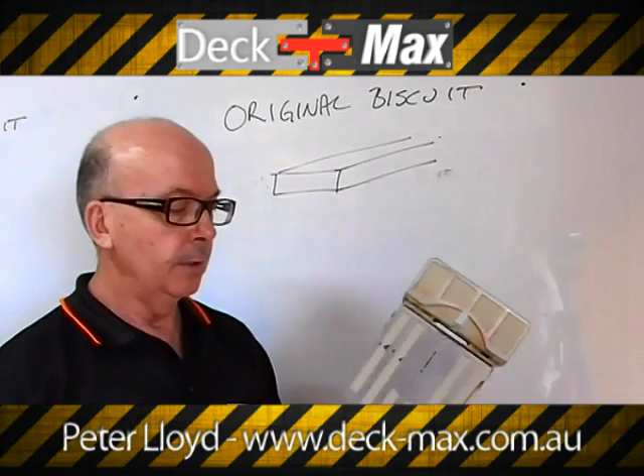This is a biscuit cutting tool. It's a standard off the shelf. You can vary how much you wish to spend on it. The blade has a controlled depth, how far out of this housing it comes, so that when you actually push and insert it, it determines the depth of the cut and the width of the cut on the front.

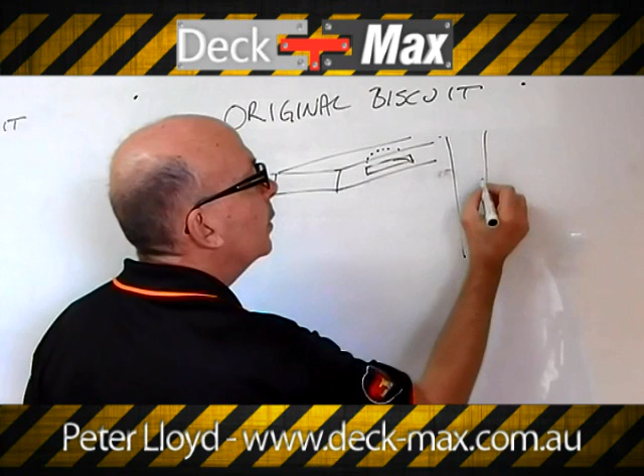It will leave a cut in the side of the board with a half moon, depending on how deep you've cut it. The depth of the cut, if I was looking at the board from the top view, how deep I cut it from here to here also varies how wide the cut is at the front, because it's actually 100mm. But the biscuit is actually different to that specification, except for the arc. It suits a 100mm blade.

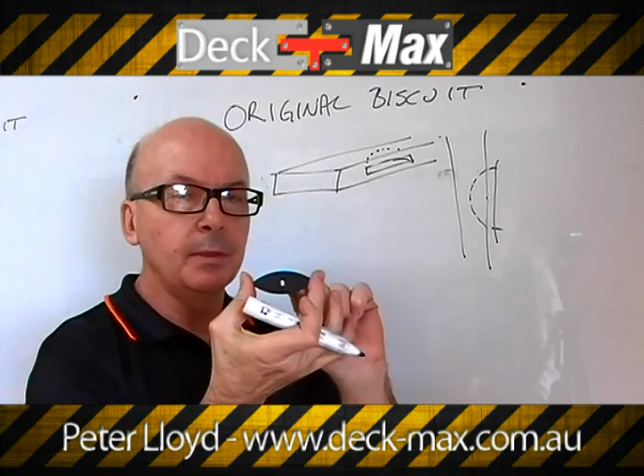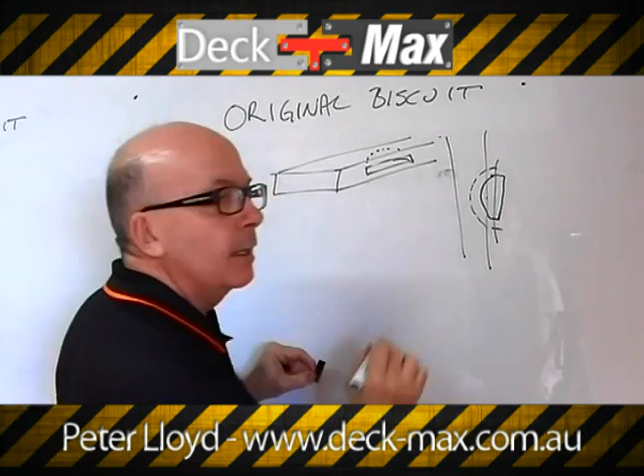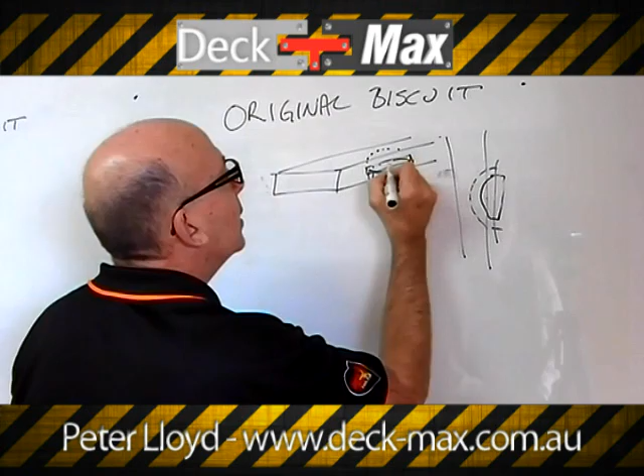The width is 65mm. So imagine if my biscuit is sitting in here. I've cut it wider, or I should say deeper. That allows me to move the biscuit to be centered on the joist. If it's not centered, it wants to what we call spoon out. All you do is just put another cut in. So this is actually where the biscuit sits. It has a little leg on it, and the biscuit and the hole, and that's how you get the pressure into the side of the board.

Remember, the purpose of this is to get away from surface fix, nails and screws. This secret fixing has a flat cut in the board, and the question often comes up, will it hold water? No. Actually, the driest part of decking is this gap here, because from the front, the airflow up this way dries the side of the board faster than water sitting on the top.

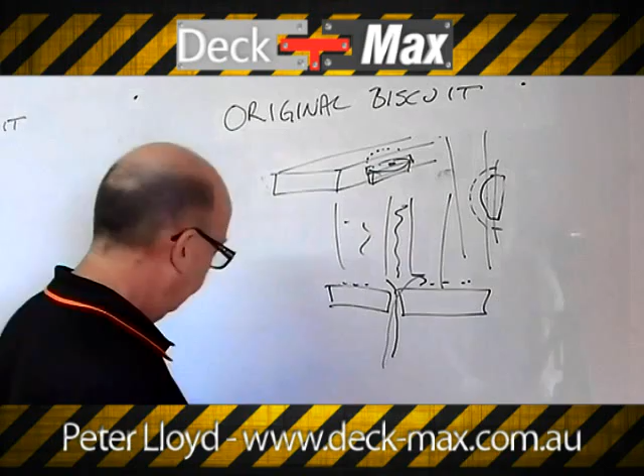So the biscuit fixing system has a little step in the process, and this goes back to just an installation idea. The board will have a groove in the side of it, and you insert the biscuit, and I'll draw that for you, it has a leg on it, and it's a T shape. That leg will be flush with the joist material. Now, what you do is you fasten the screw at probably a 10-degree angle. The screw itself has got a pan head.

So when it comes down, the pan head, that downward force on the underside of the head of the screw is extremely strong. If you use a countersunk screw, which is terrible, it'll just drive through. It's very weak, and please make a conscious decision that the pan head screw over a countersunk screw gives you insurance.

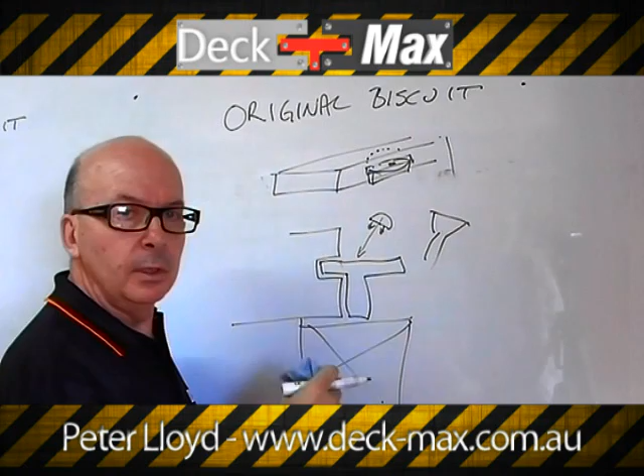Now when we fasten this screw through, it's coming down into the joist, and the pan head is sitting here. If you were to fasten it all the way, this wants to deflect down a little bit because it's not supported. What I'd like you to always remember is just leave this up maybe 10mm. It leaves that just to sit, because remember, I've got another piece of board here coming this way. I need to engage that a little bit.

See, I've got about 5mm. Just catch the edge of the biscuit itself. Clamp it down using our Deck-Max clamps. Clamp it in place. Go back and fasten the screw. It'll sit down into a rebate. Then you simply apply pressure with the clamp to push it in, and it's set.

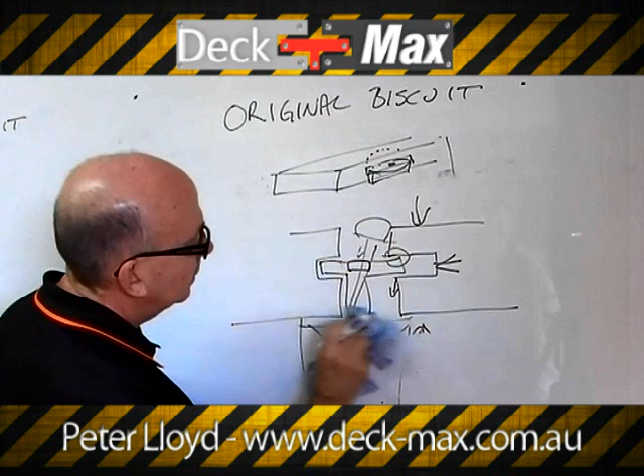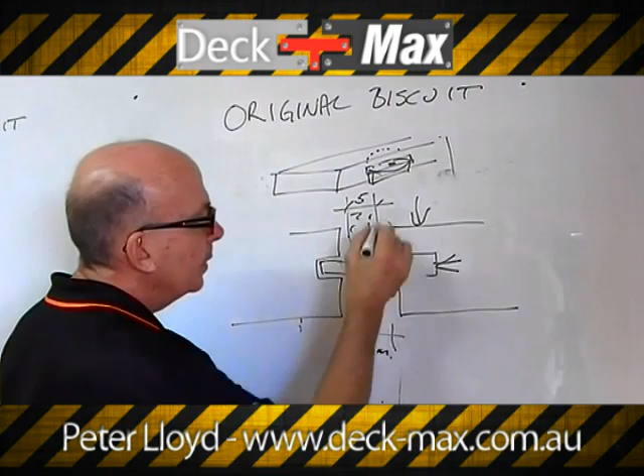What that leaves you is a 3mm gap. You can vary that gap by simply inserting a packer of some sort by the dimension. If you want a 5mm gap, you insert a piece of material that is 5mm, sit it on top of the biscuit. When the board comes in, it stops on your packer, fasten the screw down, bring your board in, remove it after you're finished. That's the process for what we call the original biscuit. What I'd like to go to is now the Pro Biscuit.

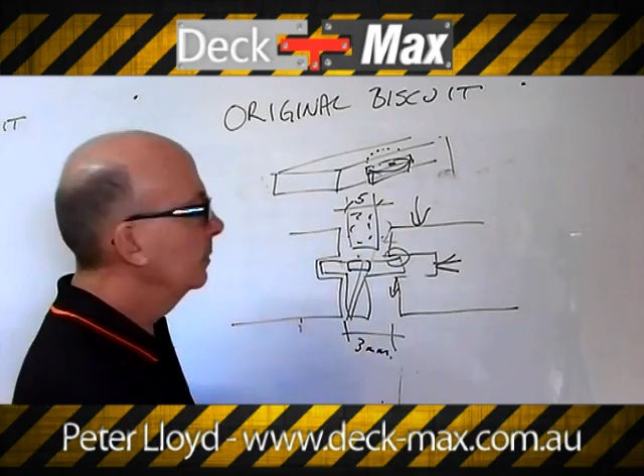Welcome back. What I'd like to do is touch on the Pro Biscuit. The Pro Biscuit was invented solely by listening to the contractors, the tradespeople and the industry, and especially DIY customers. What we found was the original biscuit that we've just touched on works fine, it's extremely strong, it's still 4 times stronger than any surface fixing, but it took time in labour and it had a decision to make about using a biscuit cutter.

We don't want you to have to use a tool, but you now have a choice. You can still buy the original biscuit, but now we're going to offer you what we call the Pro Biscuit. The first thing I'll talk about will be the timber, and then I'll talk about the biscuit. The timber actually comes end matched. I'm not too sure how well you can see this, but the end of each piece of board at both ends is grooved to receive what I'll show you in a minute will be a biscuit for joining.

That means you don't have to cut and join on joists. It's so important from a trade contractor's point of view that I don't have to have someone measuring and cutting every board. The board is also profiled. It's got a very unique design on the side of it. So it's end matched. It also has a groove. Now you'll notice it tapers up and tapers down.

If you recall from the original biscuit story, what we'd have to do is do it in 2 parts. Put the biscuit in, put the screw in, leave the screw up by 10mm, then bring the board in, then go back and fasten. What we're now going to show you is the new biscuit. I'll do it in a larger drawing for you. The new biscuit actually comes in a wedge shape. It's got a wider foot on the bottom, so it's more stable. It actually comes up and has a rebate in the top.

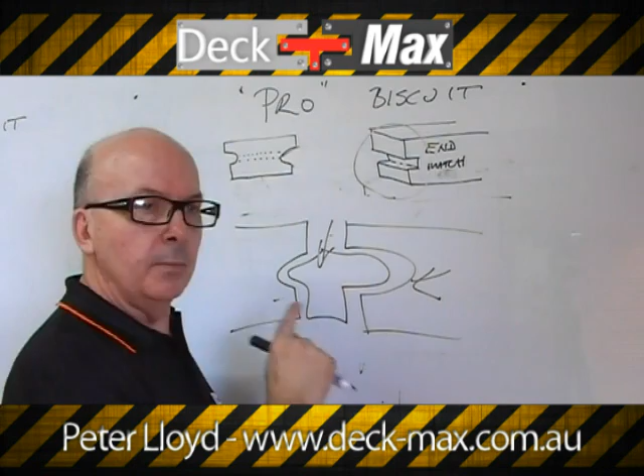The biscuits and screws are the same price as the original. Yes, there's a premium cost to prepare this timber for you. Please understand that this timber is high quality. This is as good as internal flooring, if not better. The moisture content is controlled. We take our timber from log right through a process that gives you the best performing timber.

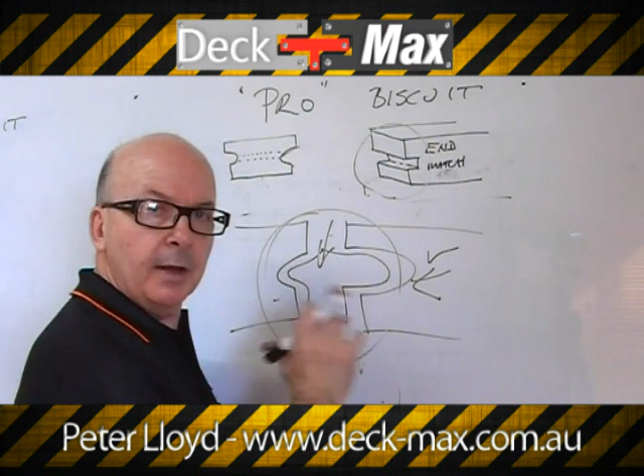We also have very good guidelines. Please go to our data sheets. It's going to give you great information about how to build close to ground. What about the gaps? What about fire rating? What about specifications for local councils?